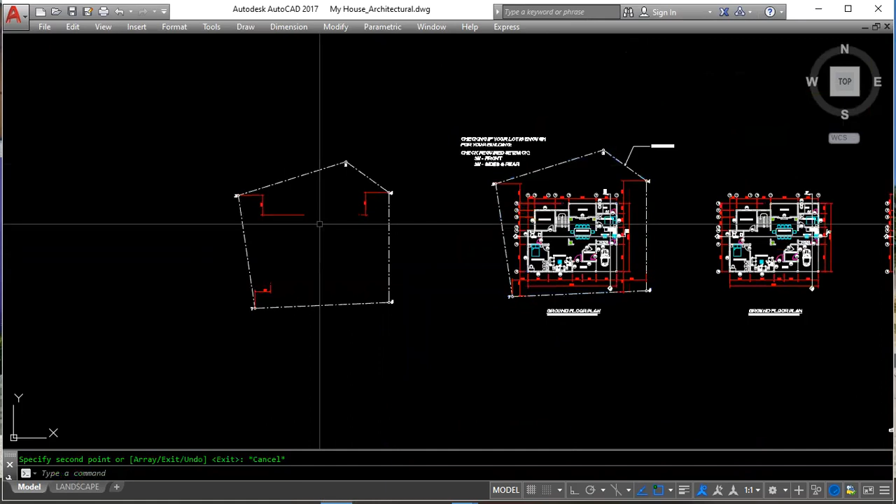I already discussed how to draw the sketch plan in class. That is just the line with a bearing. You can find the technical description maybe in the lot title or in the sketch plan. You can search the internet for anything involving sketch plan or lot title, transfer certificate of title. You have there the technical description in the lot title, stated that in the beginning at a point marked 1, that is your line 1, 2.

In this case, I have already drawn the sketch plan or the lot plan of the area. This is based on a specific technical description.

For the sketch plan, normally when drawing this, north-south is vertical and east-west is horizontal. In some cases your sketch plan is too big for the long bond paper setup.

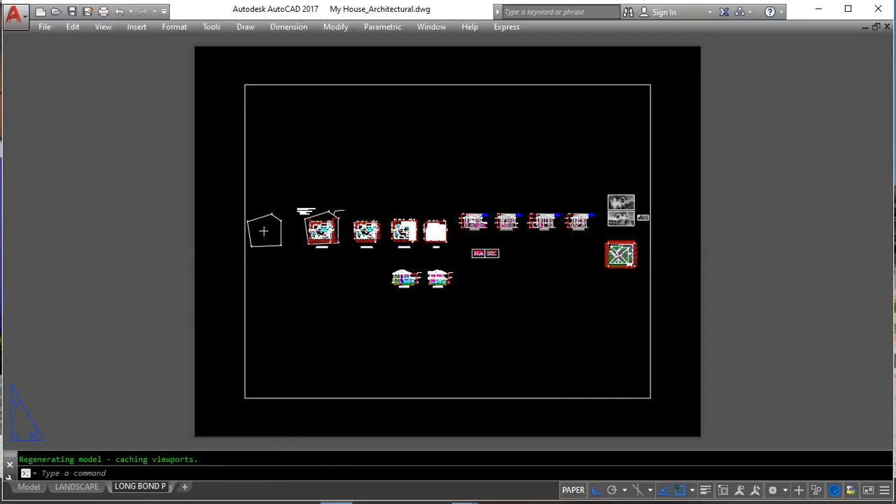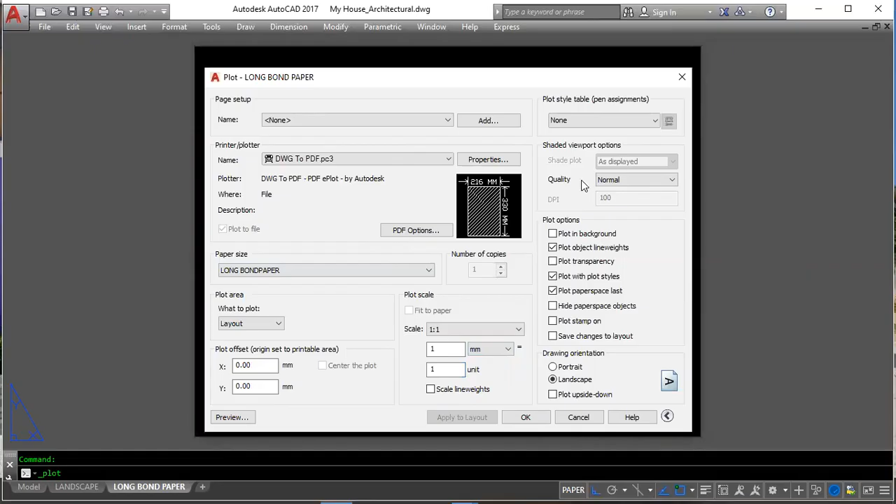So you already know how to set up the paper. I will set up another paper for the long bond paper. I have here short bond paper, it's long bond paper with your name. Also you have here the viewports.

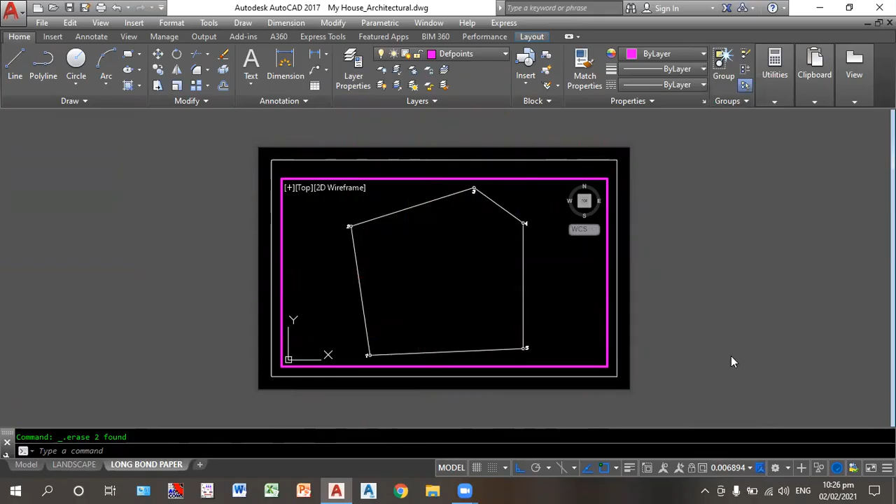In some cases there are others who ask what scale is used for the sketch plan. The scale for the sketch plan depends, since I didn't put the sketch plan on the plates. You just need to have a sketch plan for checking if your building fits or is enough for your lot, whether your building fits within your lot. So when asked what scale to use for the sketch plan, there's no need to have a scale of 1:100.

What matters is that your sketch plan should fit on the bond paper. So for example, if it's 1:100, we can adjust this so it fits, maybe let's have 1:150. So to set up a scale of 1:150, we can do this custom setting.

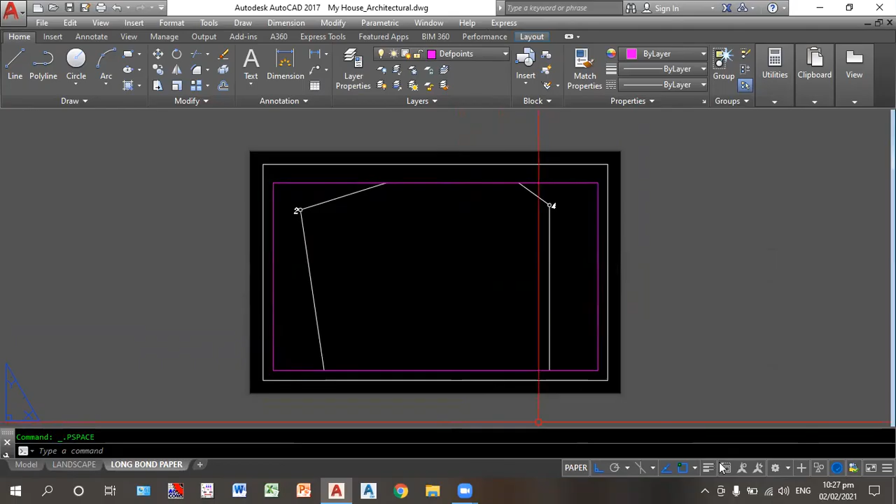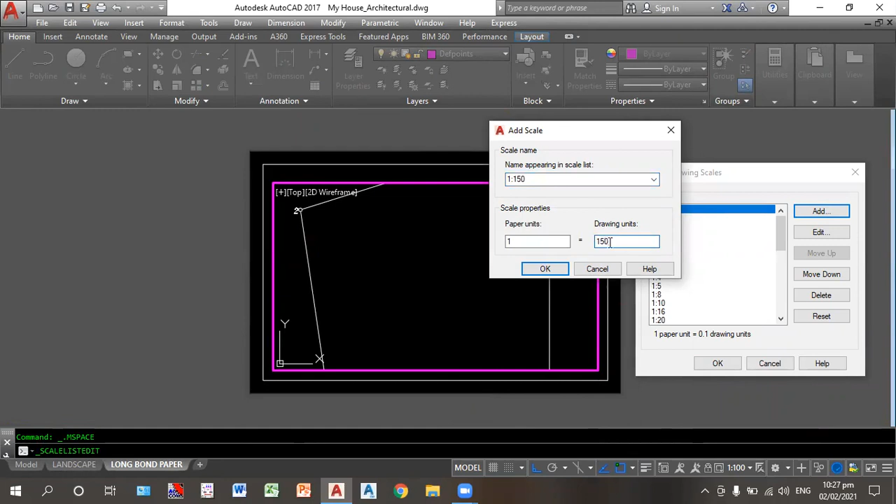Before you can have the scaling, go into the viewport or model view, then go to annotation scale, go to setup, custom. Have the edit drawing scales, add a scale, we can have 1:150. For 1 is to 150 scale, you have a paper unit of 1 and a drawing unit of 150, so 1 is to 150.

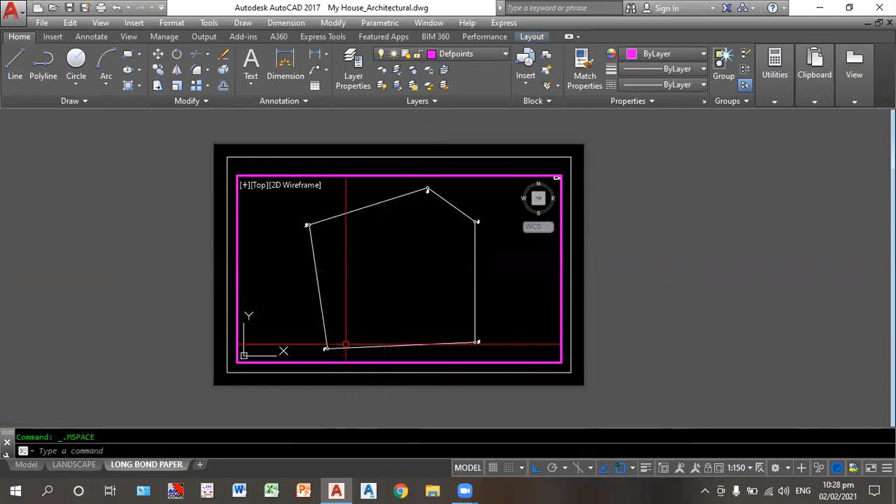For example, you indicate the technical description matching your sketch plan. So when you pass your floor plan, the sketch plan should already be attached. This sketch plan goes on plate number 1. Also, it's not allowed to fabricate your sketch plan. By the way, when you pass your plate number 1 together with your drawing of your sketch plan,

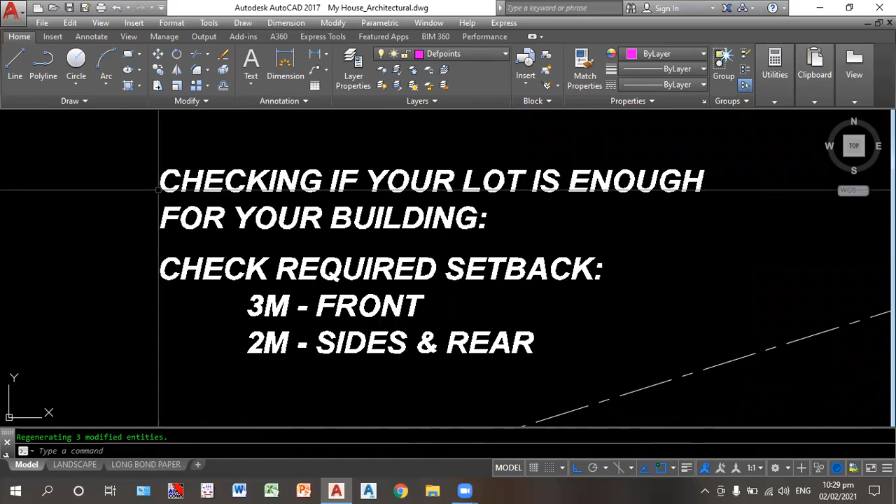Also there's this checking based on the required setback - checking if your lot is enough for your building. So we check if the building fits within the lot. In our drawing, this drawing is 1:1, or that is in millimeters. So the units are the same for checking if your building fits, unlike with the scaling.

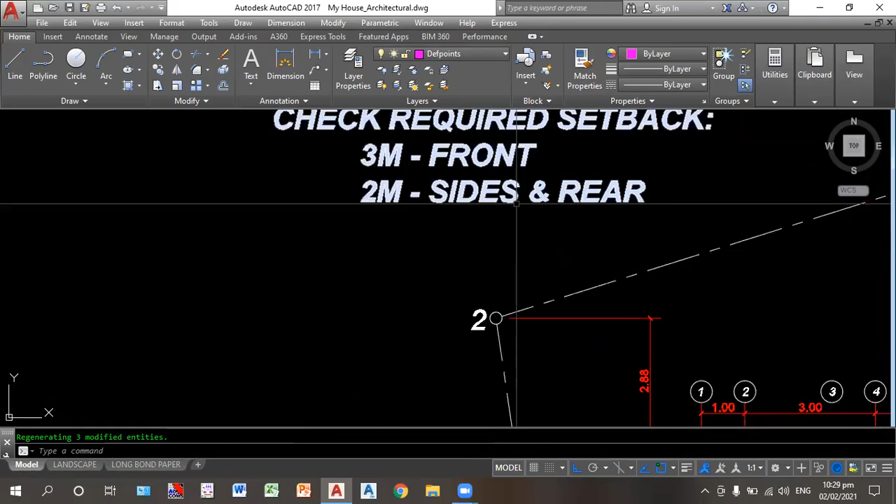To check this, you should have a front setback of 3 meters, and side and rear setback of 2 meters. So you just offset. This is in millimeters, so 2,000.

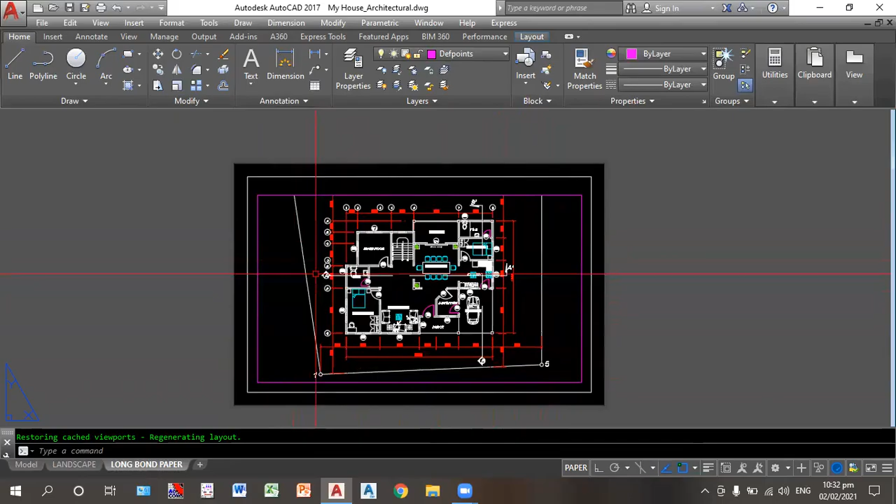Okay? So you know already how to make a floor plan. Okay? Kamo na bahala.

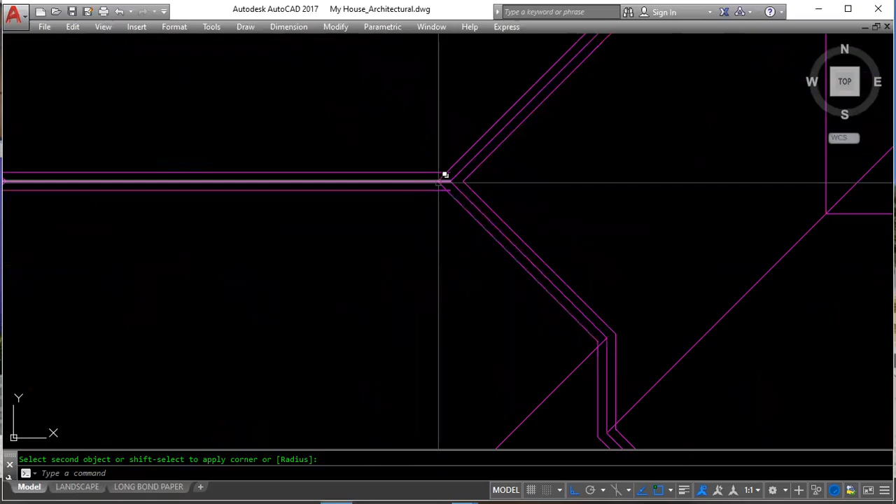So next class, I will just continue with your plate number 2.